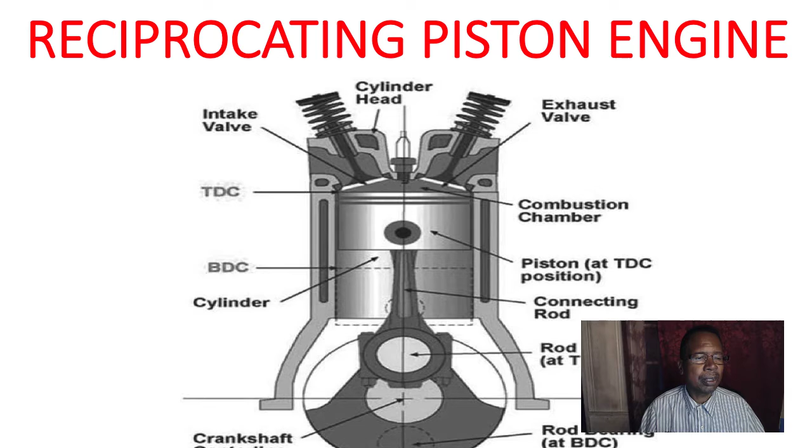Next thing is the 4 strokes. Now, understand these 4 strokes are intake, compression, power, exhaust.

The piston starts at top dead center. As it starts to come down, the intake valve opens up, air-fuel mixture comes into it to fill the cylinder. As the crank starts to rotate, it starts to go back up. It compresses that air-fuel mixture just before the ignition.

It takes the temperature just below ignition point. So when you get to top dead center, it starts to compress it. Just before you get to top dead center, current runs through the wire to the plug and ignites it. Then you get a small explosion when it burns the air-fuel mixture. That source of power is created.

It will push the piston back down. Power stroke - the piston now being pushed back down. As it's going down, it's burning the air-fuel mixture.

Now, after the air-fuel mixture is burnt, and hopefully it burns almost completely, the piston goes back up, and the exhaust valve opens up, and the air-fuel mixture that was burnt from the power stroke leaves past the exhaust valve.

So in this case here, again, we've got intake, compression, power, and exhaust strokes. It's a 4-stroke engine.

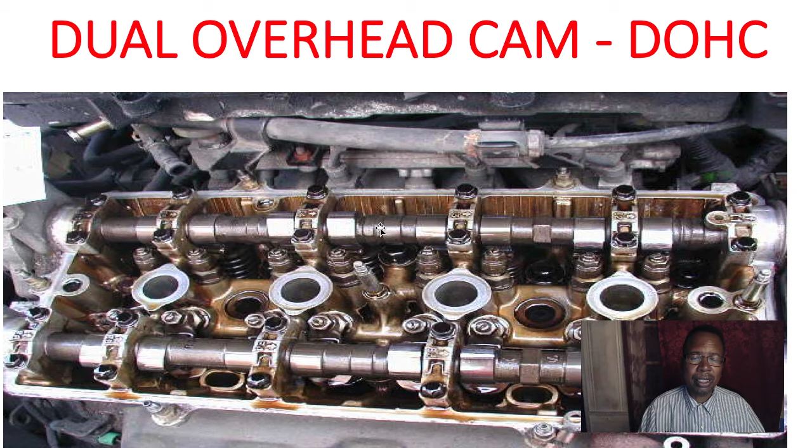Here's a picture of dual overhead cams. Here's the exhaust cam, this is the intake cam, intake manifold. Here's the exhaust cam, exhaust right here. This right here is the cam lobe to open up the valves.

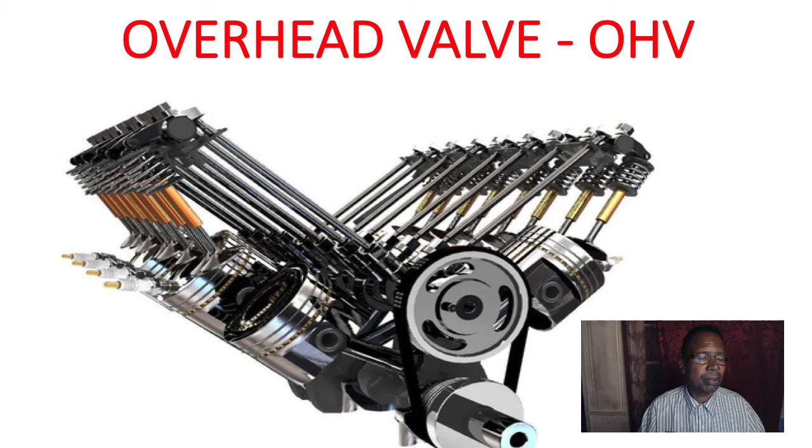Here's the piston, here's my valves overhead, springs, connecting rod, push rods. Again, look at the crankshaft - that's why it's 2 to 1.

Look at the crankshaft, it's much smaller than the camshaft. That's why it's a 2 to 1 revolution, and that's why the crank rotates twice per revolution.

Here's my timing chain, I have a belt or a chain. The alignment of the crank and cam is very important - that's called valve timing.

Here's my cam here, here's my cam lobes. The cam lobes are very important because that opens up - it pushes on the lifters, will push the push rods, in some cars connects to the rocker and opens up the valves. The duration, or how long the valves are open, all depends on the cam lobe.

And up here we got our rockers, adjustment here, the valve clearance, valve springs that close the valves, intake and exhaust valve.

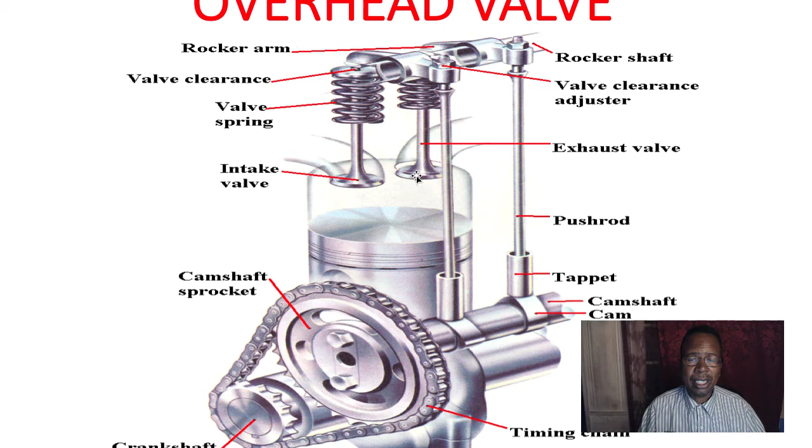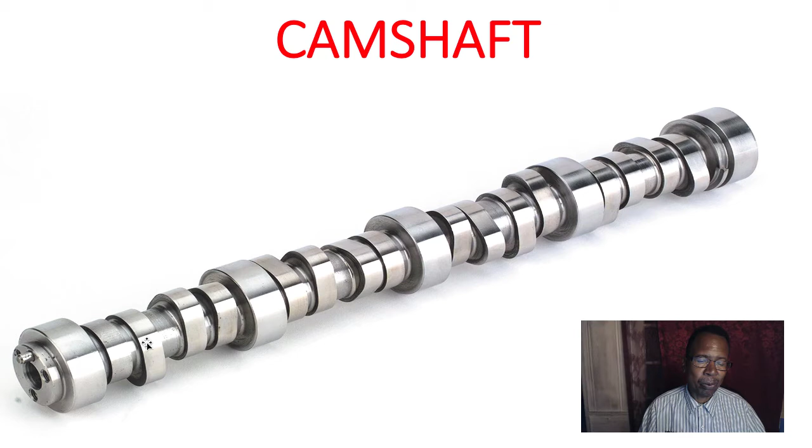Here's my camshaft, you can see the lobes that open up the valves. These are the journals, here's the lobes. That's the lobe configuration, a geometry.

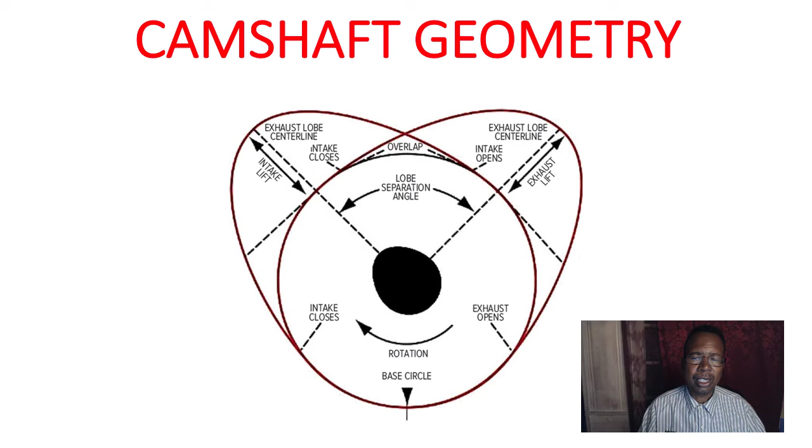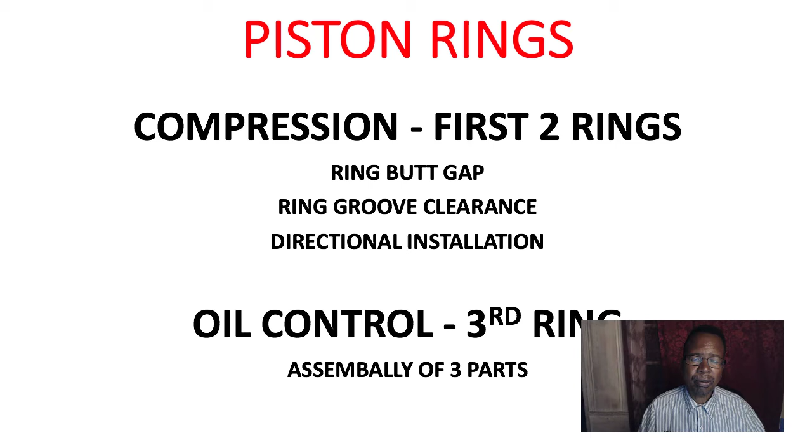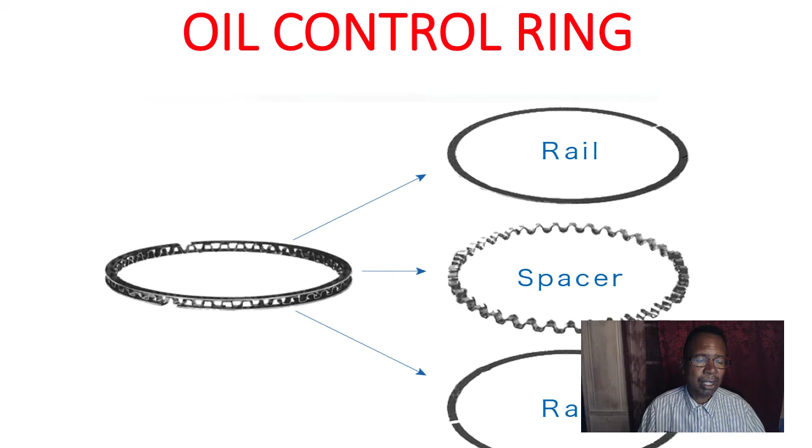Then you got your oil rings. Like I said, this is never aligned like this. So if this gap was here, the top gap has to be either over here, here, or here, so you won't lose compression. Now, every manufacturer does it differently, but they never align like this.

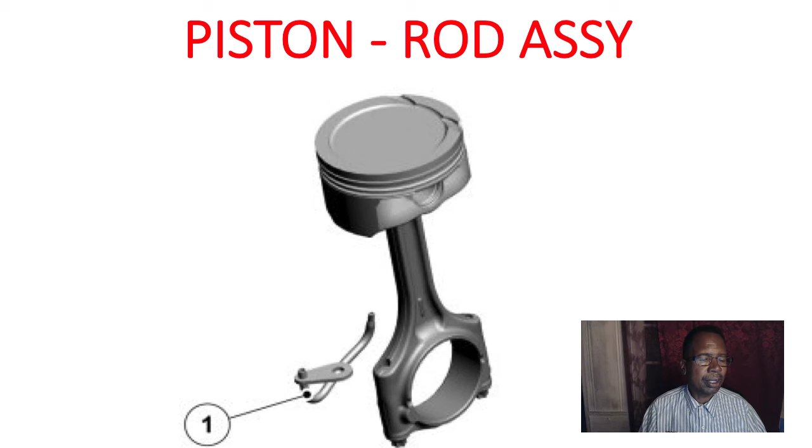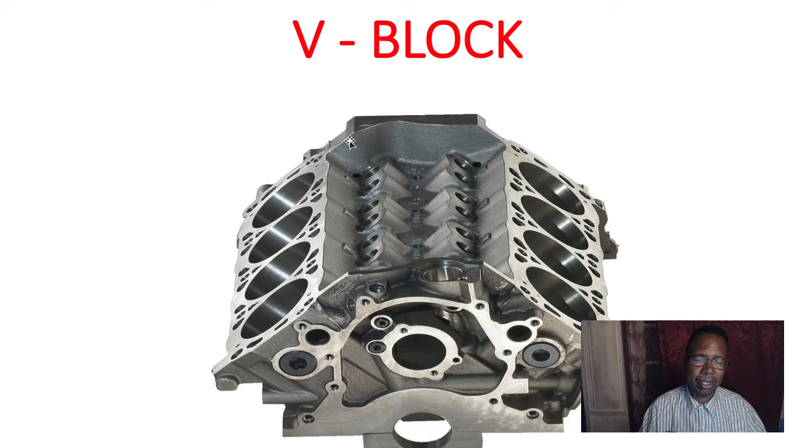So remember, the degrees of rotation per stroke are determined by the number of cylinders. 2 crank revolutions per cycle, 360 degrees per rotation, 720 degrees divided by the number of cylinders.

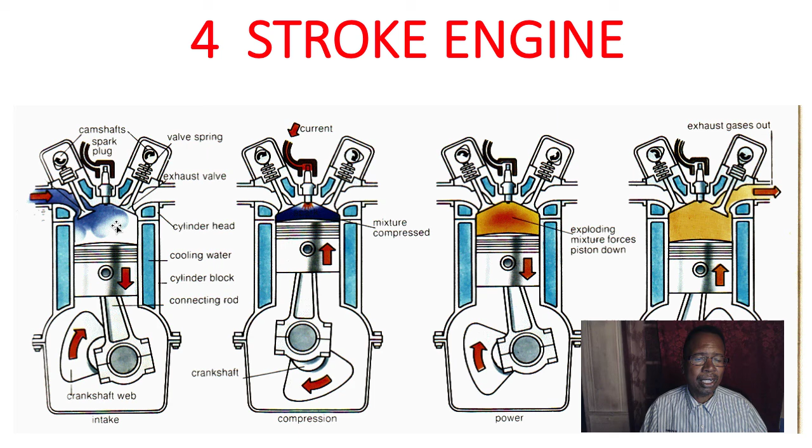Okay, so just a reminder, the four strokes on a reciprocating type engine are intake, compression, power, exhaust - intake valve, exhaust valve, pistons internally.